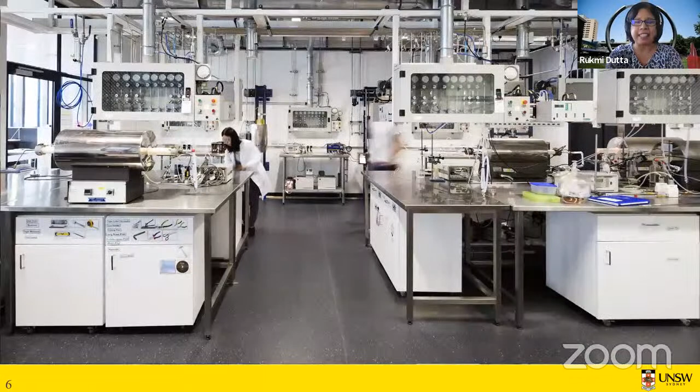This is our quantum engineering lab. UNSW's School of Electrical Engineering is one of the pioneers in quantum computer building. So this is one of those facilities. Oh, this is another facility.

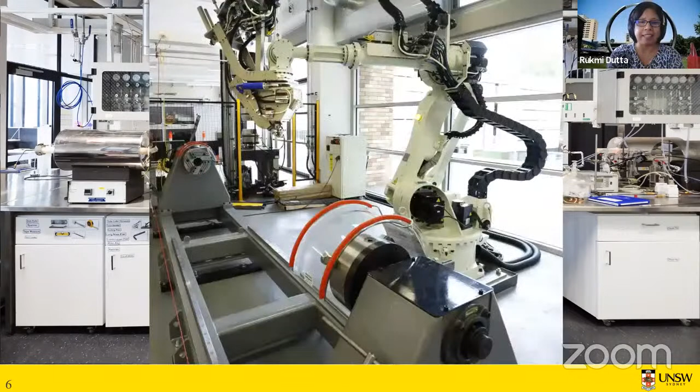Then coming to the School of Electrical Engineering, we consist of 5 research groups, including energy systems, which I belong to. And we offer not just electrical engineering as a specialization, we also offer telecommunication engineering, quantum engineering, and also space and aerospace engineering. We have about 2,000 students in electrical engineering, including undergraduate, postgraduate and PhD. We have about 20 professors, 7 associate professors, and 8 to 10 lecturers and senior lecturers. And then we have quite a large number of technical staff who are our main support for running the labs and lab facilities.

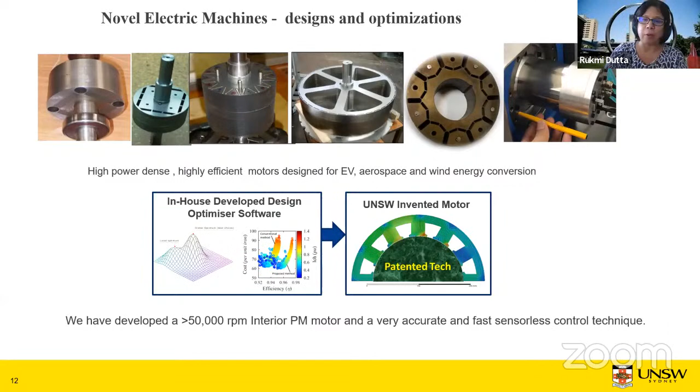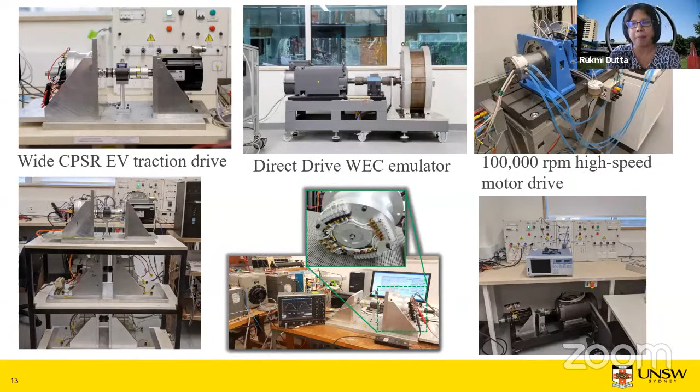We have also developed other types of motors. One you can see is a very thin pancake type. The other one, the bottom one, is actually a multi-phase electric machine with 5 phases. We do have drive systems for this type of special machines as well. You can see a few other power electronics inverters here, one 5-phase 2-level inverter; 3-phase 2-level inverters are pretty common in our lab.

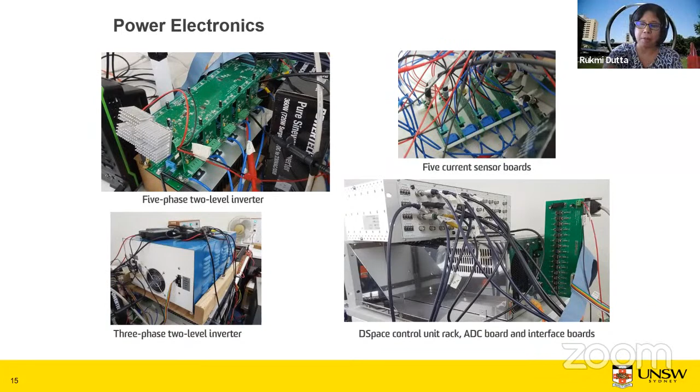Current sensors, boards, control boards, they are again quite standard and can be found in all our experimental setups in which our PhD students, and sometimes also master students, are involved. We also have, in fact, a silicon carbide inverter, which we built recently as we developed a very high-speed electric machine. This type of high-speed machine requires very high frequency inverters, and because of that, we have built this silicon carbide inverter in-house.

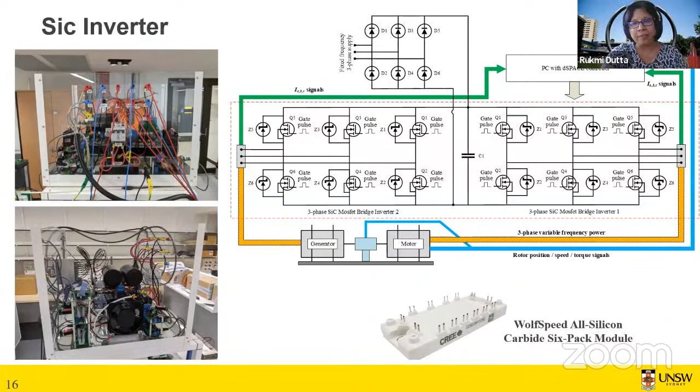So many of the things, not just we do the research, but we build and test in-house. That's the fun part of the research in our university. It's not just theory, it's always learning by doing things with hands. And that is also the motto of UNSW, engineering especially. So these are some facilities which are available if we do collaboration, for some of you, if you come here for a short stay or would like to explore higher study, which I hope some will be able to achieve someday.

There are opportunities, most likely through Australia and India strategic research grants, so maybe those can be explored. Although getting a scholarship at UNSW is not easy. It's a very competitive affair, as international students have to compete against people from all over the world. But of course, for others like postdoc or even faculty exchange, there could be some India-Australia strategic grants which could be explored if someone wants to come for a short stay and do some research with us.

And you will always be welcome. And I hope from this course, that sort of collaboration will happen, and maybe later it could expand to the institute level. That's my hope. Thank you very much.

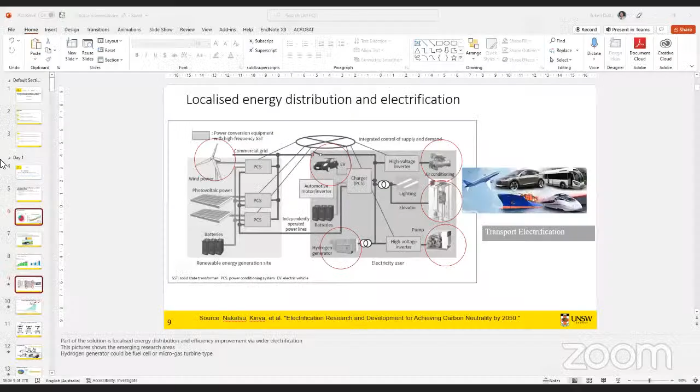I'm going to share my screen now. Could you see it? Yes, ma'am. Yeah, you see it. Okay, and let me just turn on a laser pointer so that I can point to things.

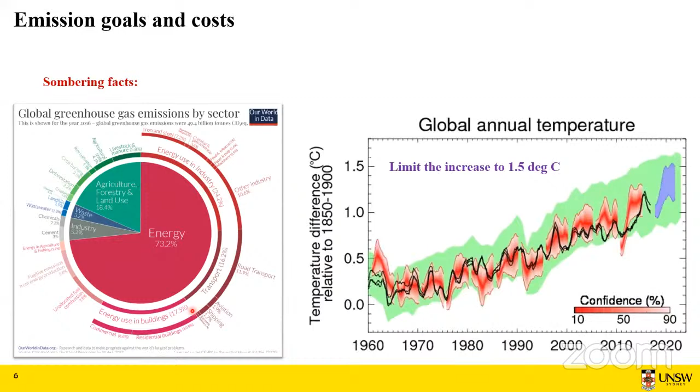Now, what are the targets? According to US research, they want to reduce CO2 emission by 2026, not very far off, to 163 gram per mile. Whereas the European Union wants it to reduce to 130 gram per kilometer. And my understanding is the long-term goal for India is not to exceed the per capita emission of the developed world. So all, including India, need to play a part here to reduce CO2 emission.

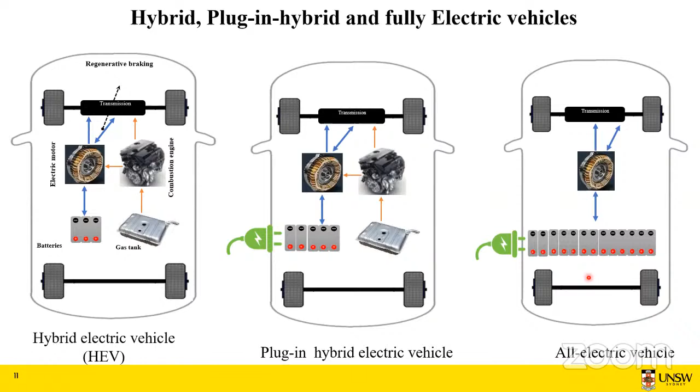But remember, especially for those who drive cars, we have only a limited amount of space to install the motor or battery where the engine used to be. You don't want a larger car - you still want the same comfort. But in that limited space, you have to fit in the battery and the motor. So what should be the power needed, since the motor is now going to replace the IC engine?

To understand that, let's look a little deeper into the electric traction drive inside the electric car. Especially for those who drive, you can relate - once you press the accelerator, usually your engine brings the car to a certain minimum speed in first gear, then you change gear to accelerate further to higher speed. But in EV, once you press the accelerator pedal, it gives a command to a controller - that is a speed command.

You want to drive the car at a certain speed. That command from the controller goes to the inverter, and the inverter drives the motor at that particular speed. So why would we need the inverter?

Because your motor is going to be a 3-phase AC motor. It cannot be a DC motor, because a DC motor is inefficient, and its power density, that is power per meter cube, is much lower. So if we want to use a DC motor, it will be a very large motor. And as mentioned previously, we only have a certain amount of space in the car. We don't have infinite space, so we have a volume constraint there.

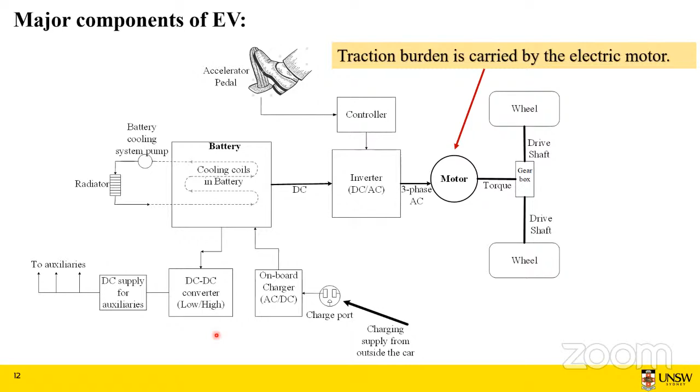So that means we have a constrained volume, and the other problem is that we need a much more powerful motor. As a solution, some EV companies actually use 2 motors to drive the front wheel and the back wheel, so this is like a 4-wheel drive. But the smaller ones use only 1 motor.

So the most popular electric car commercially available at this stage is Tesla. I am not sure whether it is available in India, but it is quite common nowadays in Australia. Out of maybe 100 cars, at least 10 will be Tesla, so it's getting very common. The Tesla EV doesn't have any engine, only driven by electric motors and battery. It's a fully or all electric car, and it solved the problem of the powerful motor by having two motors.

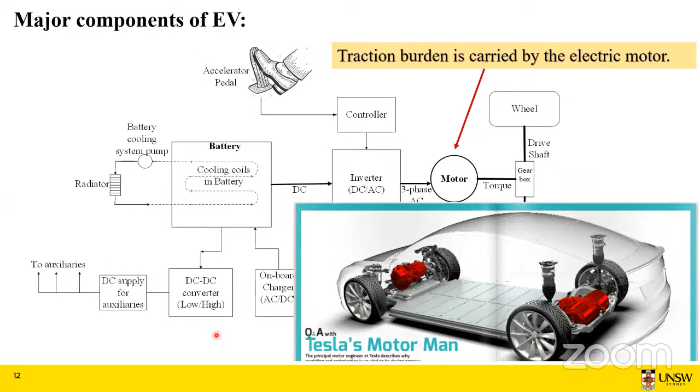Now, of course, a car itself is quite expensive, and an EV is even more expensive. So where does the cost come from? As you have seen previously, the inverter - we will need an inverter if we have to drive the car by battery, DC power - that inverter cost is about 40%. The electric motor is about 20%, and all other things like the transmission system required to mechanically connect the motor to the axle drive of the wheels, and other smaller power electronics converters, cables, etc., are the remaining cost components. But you can see that the major cost is power electronics and the electric machine together, forming about 60%.

So one goal for electric machine drive is to reduce this cost. One is to reduce the size, because you have a constraint on volume - you only have a certain amount of size or space in the car. The other is cost, so that it can be made affordable to everyone. Otherwise we will still have the same problem. If people are still using IC engine driven cars, then it's not the solution for CO2 reduction. Only when the majority of the world population can have access to EVs will it have a major effect.

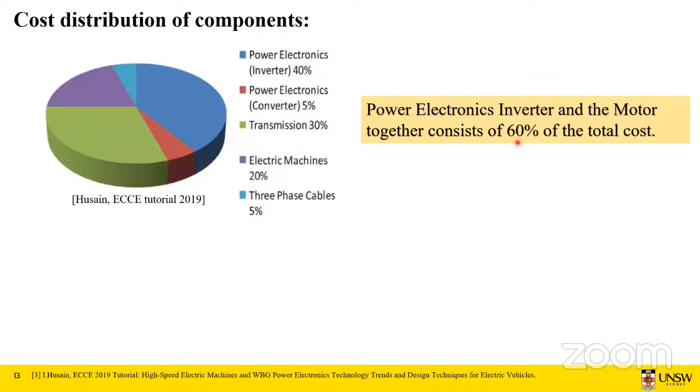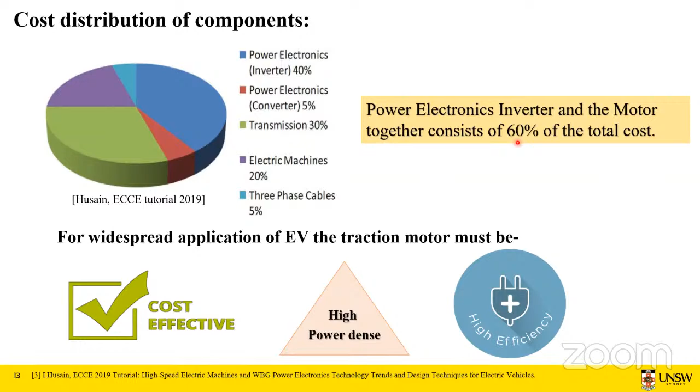So we need high power density, meaning a very small motor but with much higher or stronger power. And we need it to be cost effective so it could become widely available to everyone. And then third, of course, it needs to be highly efficient.

Based on this, a set of specifications was determined by the US Energy Department back in 2016. Part of this specification has already been achieved, although it was supposed to be quite challenging when it first came out. One of the major challenges at that time was, of course, to reduce the cost while achieving an efficiency greater than 95%.

Then having a voltage not more than 600 volt. This was set as a safety concern because more than 600 volt in a car could be dangerous. So that's why this 600 volt was set up as a maximum limit for the back EMF that can be generated by a motor when it is driving at its highest speed.

And the DC-link voltage set to be about 450 volt, but in recent time, it has actually exceeded 450 volt. It's gone to nearly 600 volt itself.

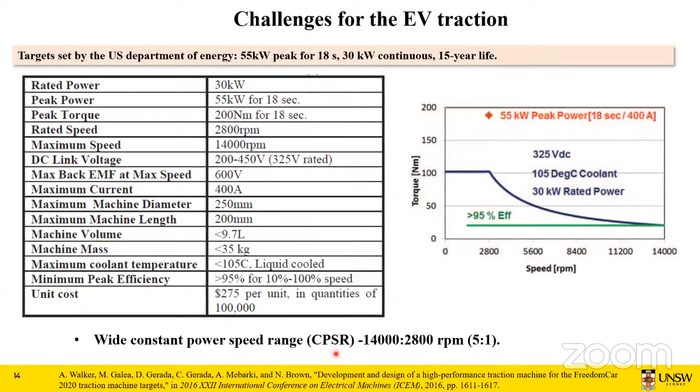So this is achieved actually in the IC engine by using a complicated gear system. Okay, and we all know gear systems are inefficient, and the engine doesn't have an ideal traction drive type torque speed characteristic. We force it to behave this way by using those complicated gears.

But when we are going to EV, if we can eliminate this gear system and can achieve the ideal torque speed characteristic of a traction drive in the motor itself, this torque speed characteristic, as you can see, the black line, then it will be quite useful. So that was one objective, to achieve an ideal torque speed characteristic in the traction motor. That means having a constant speed range or constant power speed range.

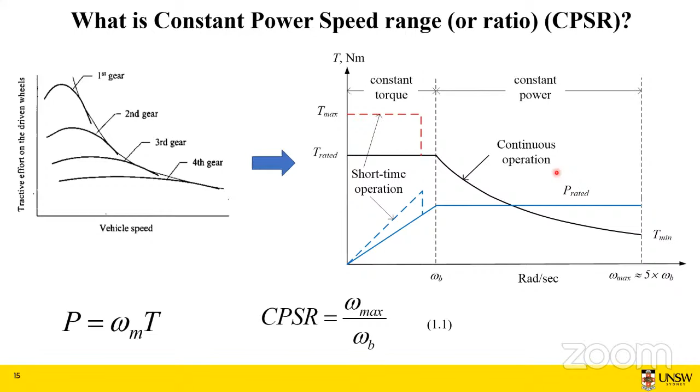So how this power becomes constant, you can look at that simple relation of power versus speed and torque. So if your speed is increasing, torque reducing, power should remain constant. So that's the constant power. So ideally, this power of the motor should remain constant when speed increases and torque reduces in traction drive. So what's the use of keeping this power constant can be understood here.

We can start with a very simple relation of force is equal to mass times acceleration. You all know, right? So starting from that, force is equal to mass times acceleration. So dv/dt is our acceleration, m is mass, and f is force. So from this relation, with a little bit of mathematical manipulation, we should be able to find what is the acceleration time of a vehicle to go to a certain minimum speed, let's say.

This maximum speed, 60 miles per hour in this figure, okay? And the minimum speed was about 25 miles per hour. That is the constant torque part, your first gear speed part. So from here, we can also find out what the power of the motor needs to be for a certain amount of mass, certain acceleration time, certain value of minimum speed, and certain particular speed at which you want to drive the vehicle.

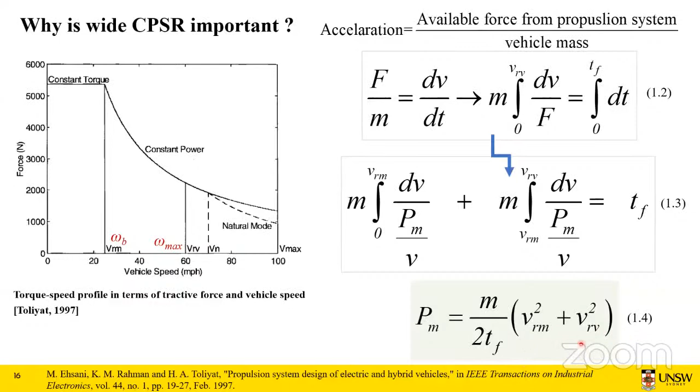Okay, so this is coming from the basic force equals mass times acceleration relation. As many of you know, force can also be written as power over velocity. Okay, so that's how this power relation was developed. And we can see immediately that the motor power will be a function of the mass of the vehicle, the acceleration time, inversely related with power, and the square of those velocities.

This same equation we can convert to rotational speed, because, as we know, the motor is going to run with rotational speed, whereas when our car drives, we consider it as linear speed, that is miles per hour or kilometers per hour. That's our linear speed. But the motor, or your wheels, actually run in rotational speed. So that's why we are more interested in the rotational speed.

So the same equation can now be converted to rotational speed using the simple relation: linear speed is equal to rotational speed times the radius of your wheel. In this case, R means the radius of your wheel, times the rotational speed of the motor. And so if we convert our linear speeds in the first equation to rotational speed, the power equation becomes in terms of inertia, J.

Okay, so from here we can see that the rated power of the motor will be a function of the inertia. Inertia means how heavy your whole vehicle is going to be. That will determine your inertia, your required acceleration time, the minimum motor speed, and the speed at which you want to drive the car.

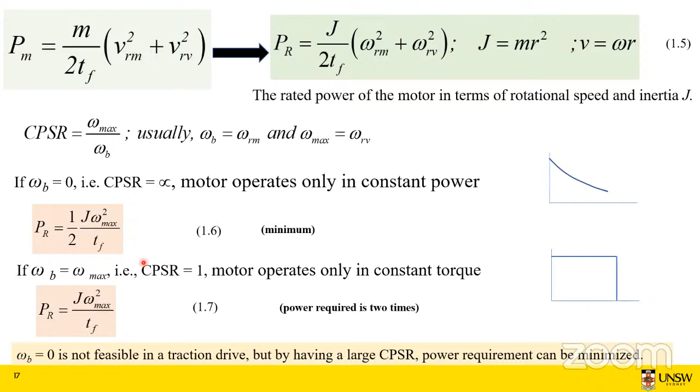Now, with CPSR, it's not only the wide CPSR, but we also need, as I mentioned earlier, the cost. So we have to reduce the system cost of the traction drive. And cost means the cost of the power electronics as well as the cost of the motor. So when you design a motor for traction drive, we want wide CPSR. We want minimum cost. Minimum cost actually translates also to a smaller and lighter motor. So reduction of the weight and reduction of the volume. So these are another 2 objectives when you want to design a traction motor.

So we can say now we have a couple of objectives for traction drive or traction motor. One is it must be highly efficient. It must be cost effective, or with minimum cost. We must have wide CPSR. It must be lightweight. It must be of smaller volume. That is, kilowatt per kg and kilowatt per liter must be high enough. So when we optimize motors, these could be our objectives when we design them.

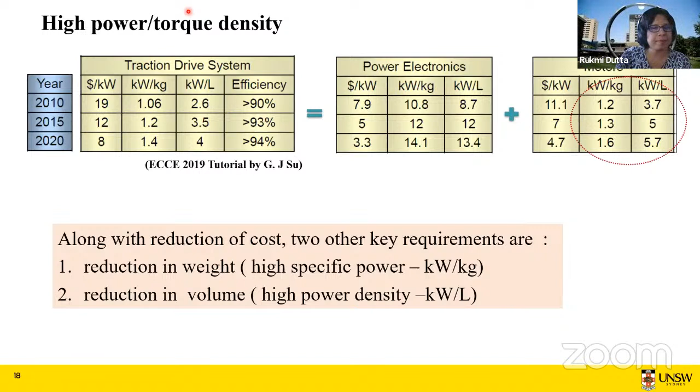If you have a question, you can use the chat window. You can also raise your hand and turn on your mic. And those who are in the room, maybe you can use the mic. As of now, no questions from the offline students. Any questions? I think no. No questions from the offline students. And even online, no one has any. Online, I cannot see any chat. Okay. Do you like to take a break for maybe 5 minutes? Yeah, if you want, you can take a 5 minute break and continue.

Okay. So you can think about what we have just discussed. You can note down the most important points that you remember from what I have just discussed. And also think about whether there is any point which is not clear to you, which could become a question. So during this 5 minute break, just reflect on what we have discussed.

Okay. So this is like 54 on my watch. I don't know what's the time there. It's 11:38 now. 11:38, okay. So 11:43 or 44, yeah, 11:44 back. Okay. After 5 minutes, we'll start again. Okay, can we come back? Can I have your attention back? Yes, sir. Still no questions? Any questions from the offline participants? I think as of now, no questions. They may ask at the end of the session. Okay.

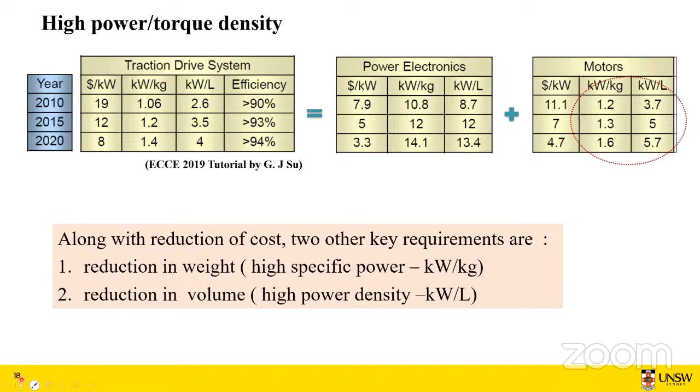Now, the next application is direct drive renewable energy conversion. So in this section, we will try to understand how direct drive technology for renewable energy is evolving. We will look at the advantages of direct drive generation, and then we will also look at the desirable performance for an electric generator that can operate with direct drive.

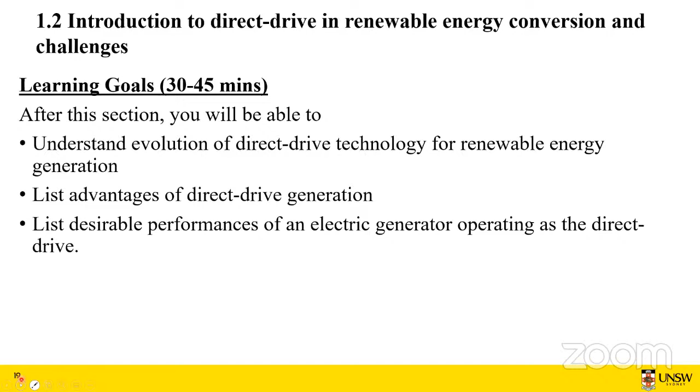So if we look at wind energy conversion as an example of renewable energy generation, initially when it was developed, some of you may know, it actually used the asynchronous machine, or induction machine, as the generator. The reason was that, as you know, when the wind speed changes, the blade of the turbine is going to rotate at different speeds. So you could have variable speed at the input shaft of the generator.

And a synchronous machine's speed and its frequency are directly related. So a synchronous machine doesn't tolerate change of speed much, whereas an induction generator, because it has a slip between the synchronous speed and its actual speed, can allow or tolerate variation of speed. So that was the main reason for using induction generators in wind energy conversion.

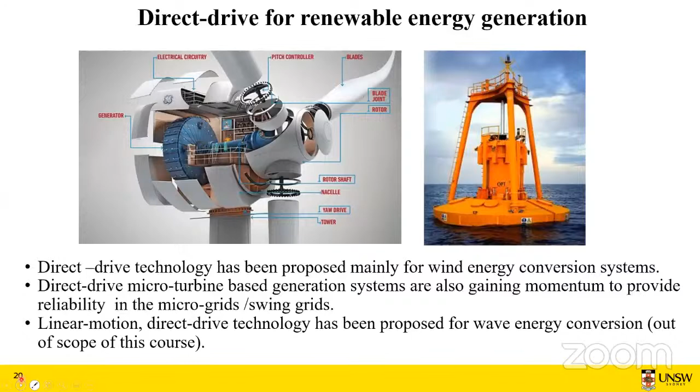So in direct drive applications, we have a couple of things coming up. For wind energy conversion, you want to eliminate the gearbox and run the generator at the same speed as your turbine. In the wave or tidal energy space, you want a linear generator rather than a rotating one. And the supporting generating systems proposed are gas-driven microturbines; if you want to make them direct drive, they need to run at very high speed.

So on one side, for wind generation we need low speed, because the rotor blades and rotor shaft run at low speed, so with no gear the generator needs to run at low speed. On the other hand, for the microturbine, if you remove the gear, the generator and gas turbine need to run at a very high speed. And the third one is the linear generator.

In this course, we are not going to talk about linear generators or linear machines at all. That could itself be a course. So we will concentrate mostly on direct drive wind generator systems, and we'll also discuss a little bit about high speed machine design.

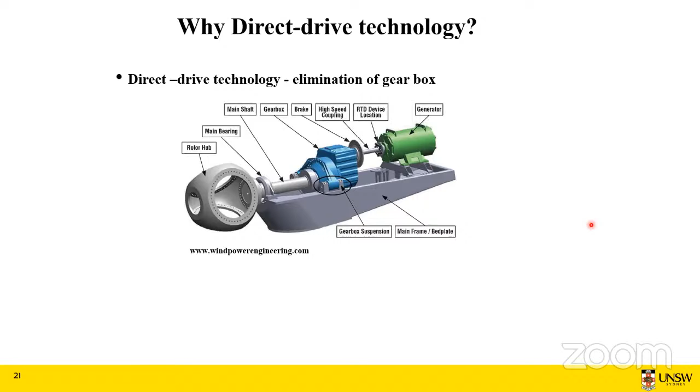So when we replace or remove the gear, the advantages are it's going to reduce the complexity. It's also going to increase the reliability, efficiency, and lifespan, and reduce maintenance in the case of direct drive wind energy conversion systems, and the same benefit stands for gas microturbines. But the shortcoming is that they are going to be much more expensive than the existing system,

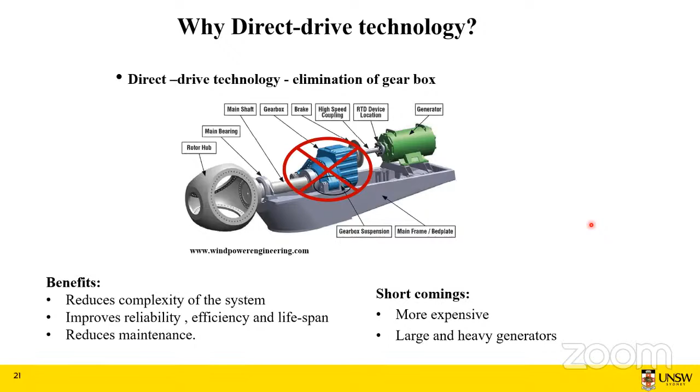because the generators, especially for wind energy conversion, when you need low speed, are going to become very large and heavy. So why they become large and heavy, we can understand quite easily from here. The rotor speed of a wind turbine could be as low as 20 to 100 RPM. Wind speed could be 8 meters per second. For 8 meters per second, a large wind turbine speed is about 10 to 20 RPM.

Previously, you had the gear, so you didn't have to worry about the speed of your generator. It could be 1500 RPM, it could be 3000 RPM. But now, if you want to remove the gearbox, your generator also needs to run at the same 20 RPM, or about 20 to 100 RPM, whatever the rotor shaft speed is. Now, you still want a certain amount of power out of your generator, but your speed has reduced. So that means you need a very large torque.

Now, how do you get large torque? Torque translates to power. Torque and power for electric machines relate to the magnetic flux in the machine, the current you are pushing through, and the number of magnetic poles in your machine. We cannot keep increasing current or magnetic flux linkage for a certain volume of a machine. It has limitations. We'll discuss those when we discuss the design, but we cannot have infinite current, nor infinite flux linkage. For a certain power, these two have certain values which we have to keep. So then how can we increase torque?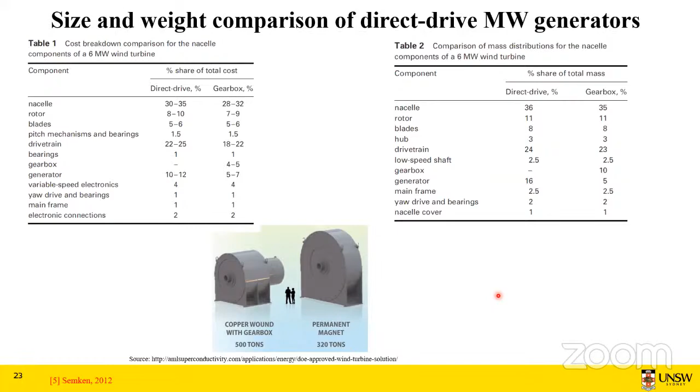So now the challenge is how to design an efficient generator that is not heavy and not too large for direct drive generators, especially for wind energy. That means low speed, high torque: how to make the generators lighter and smaller, getting the same performance. So that's the challenge for wind energy systems.

And as I said, for the microturbine based systems, direct drive systems, the speed could be as high as 120,000 RPM. Okay, 120 kilo RPM or 120,000 RPM. So for this type of very high speed, there is another problem. The generators now become mechanically vulnerable. As the speed increases, the centrifugal force that acts on a rotating body increases.

So when the electric machines rotate at very high speed, the centrifugal force it is experiencing could be very high and can break the material. The stress it creates on the material could be so high that it exceeds the yield strength of the material. If it happens, then the machine will break into pieces.

So that means when you design high-speed machines, the mechanical stability, mechanical stress also needs to be considered, not just electromagnetics. Okay, in all other designs, the electromagnetics, and of course we have to consider temperature. So thermal and electromagnetic need to be carefully studied when you design it. But when you do high-speed machine design, you also have to consider the mechanical stability or mechanical strength. Okay, so it adds extra challenges.

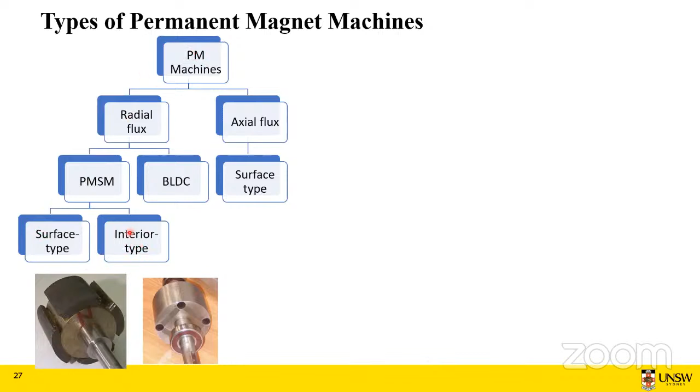Usually the BLDC motors are all surface type, but the PMSM could be surface or interior type. The axial flux machine, most common ones, have surface type rotor, but in this course we will not discuss axial flux machines at all. It operates quite differently, and its design principles are also relatively different from a PMSM. So our discussion will be PM machine, radial flux, PMSM, a little bit of BLDC, and both surface and interior type. That's what the course will cover.

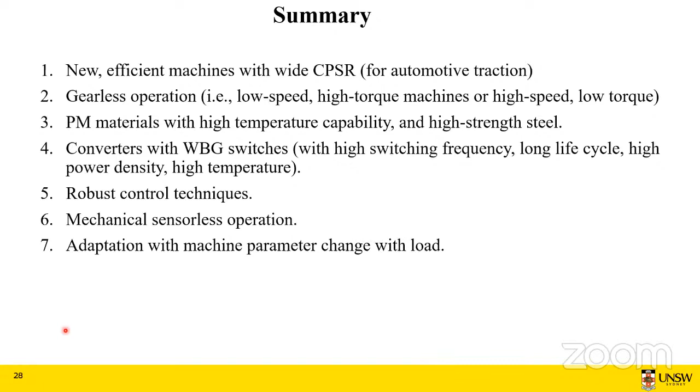So what is a reluctance motor? First, we have to think about it. If in the rotor, the one that you have seen previously, let's say our PMSM rotor, especially in this interior type, imagine we have no magnet but air here instead of magnets, that becomes a reluctance motor. So when your rotor doesn't have any magnet or any field winding, we get a reluctance motor.

So yes, the reluctance motor at first glance looks like it could be a very good alternative, but there are problems with reluctance machines because now we only have torque coming from the reluctance of the motor. That's why they need very high current, so it becomes something similar to an induction machine. Their efficiency, compared to a PM machine, could be lower. But because they don't have magnets, they are not affected by temperature. So their rotor is quite robust, mechanically also they are robust or could be made robust mechanically, and thermally they are also robust.

But the main issue with reluctance machines is that they are not efficient, their power density is relatively low, and they could be very noisy. Their torque is not smooth, so they rotate with a jerk, and that jerking motion translates to vibration and noise, so they could be noisy. But they are considered an alternative for PM machines, especially if we do not want to rely on rare earth material, and they are also less expensive because you are not using expensive magnet material there.

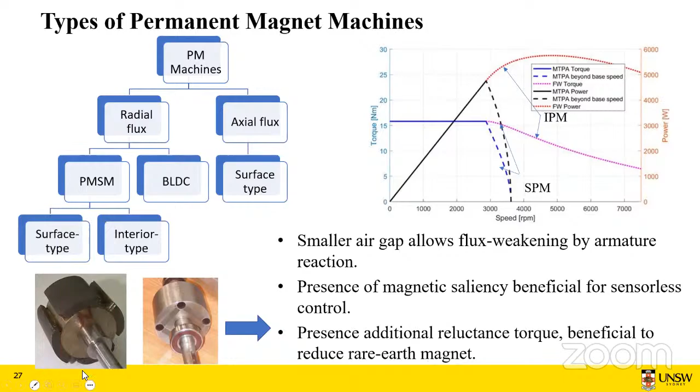Is the question clear now? Is this question from the participant audible to you now? I cannot hear, one second. Yes, it's better now.

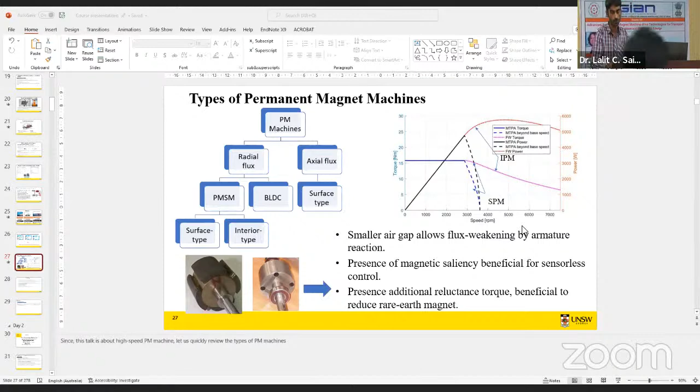Okay, all right, so you want to know about swing grid. So we have talked a little about the intermittency of renewable energy, right? That is, if you are using solar energy or wind energy, it may not be available, or it can vary.

When you have a nice sunny day, you will have a certain amount of solar energy, but on a cloudy day, you will have much less. So when you have this variation of generated energy, that means your generated voltage is also varying. And with wind generation, when the wind speed changes, your turbine rotates at different or variable speeds, and your generator could be producing voltage of different frequency.